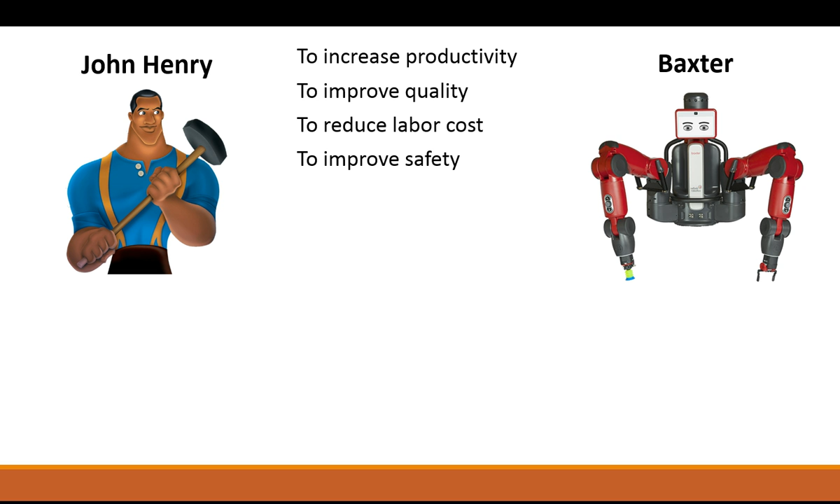It's able to improve safety because actually Baxter can get hurt or get damaged without actually hurting a person. You can put it in more dangerous situations. So you've got some really good arguments for going into a state where you've got more automation.

So on the left, you have John Henry, where it's very labor intensive. And on the right, you've got something called Industry 4.0. Now, what is Industry 4.0? It's the whole idea of going into a more automated, more computer-based industry where you remove a lot of the human factor.

Able to get a much more efficient, much more safe, much more productive manufacturing process, as well as having a lot more transparency, a lot better communication between different entities, and being able to respond better, a lot more flexibility. Now, that sounds like almost a utopia.

You can have a factory without anybody working in it, without any human interaction. You're actually able to produce parts faster without having to worry about vacation time and all sorts of other issues. But really, what's the difference? What's stopping us from doing this tomorrow?

Well, there's a lot of things, a lot of benefits to John Henry. A lot of benefits to actually having people in the marketplace, particularly in an industry. Some of them are so simple that we tend to take for granted.

Number one, John Henry can think. John Henry doesn't need to be programmed. You don't need to put an algorithm in place for John Henry to know what to do first, second, or third. John Henry can solve a problem, and more importantly, John Henry can make judgments.

So when John Henry drops a wrench in the path of a machine, he knows to stop the machine and pick it up. He doesn't have to have that programmed into him. And anybody who's ever worked around machines has seen things like machines crash, slam into something. Maybe it was programmed poorly, maybe something just happened to get in the way, but it couldn't respond to contingencies the same way a person could.

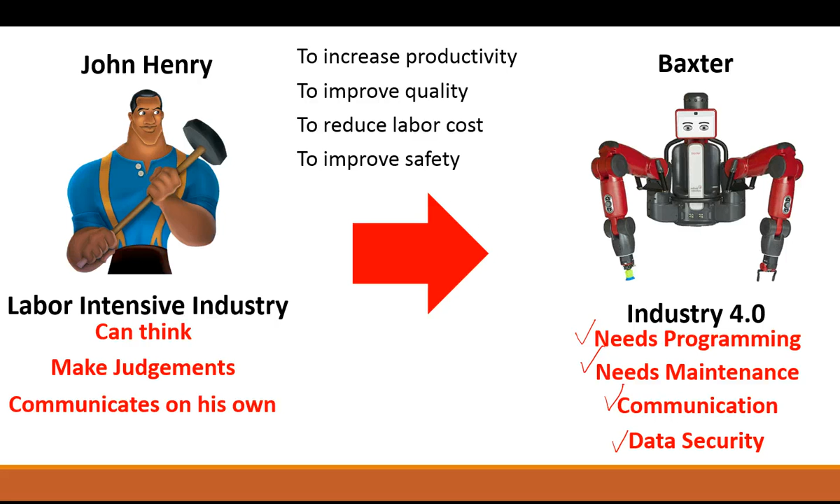With all this, we come to a new issue introduced in this dream of going from a more labor intensive industry to Industry 4.0, computer based automation, lights out operations, and that is known as the skills gap. Now, I'm not going to say the skills gap is purely based on reaching Industry 4.0. There's a lot of reasons and things that go into making it up. But it's definitely part of the issue with why we can't just switch to this tomorrow. There's a lot of different skills required to get us from where we've been in the past to this vision of Industry 4.0.

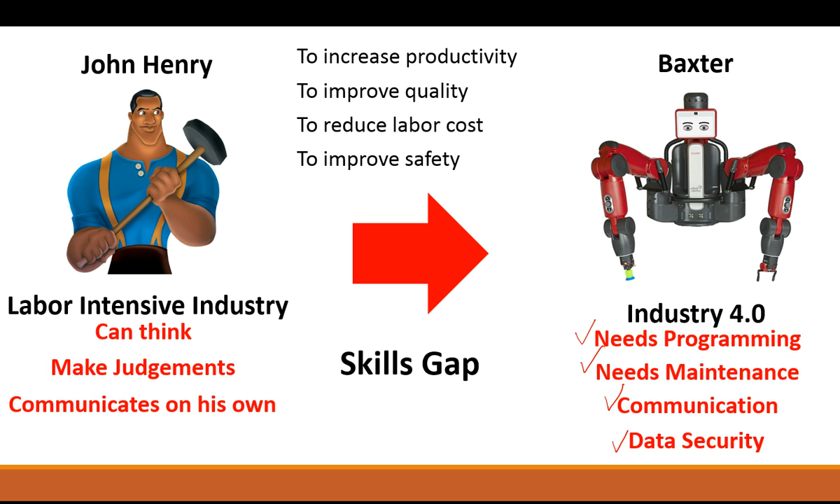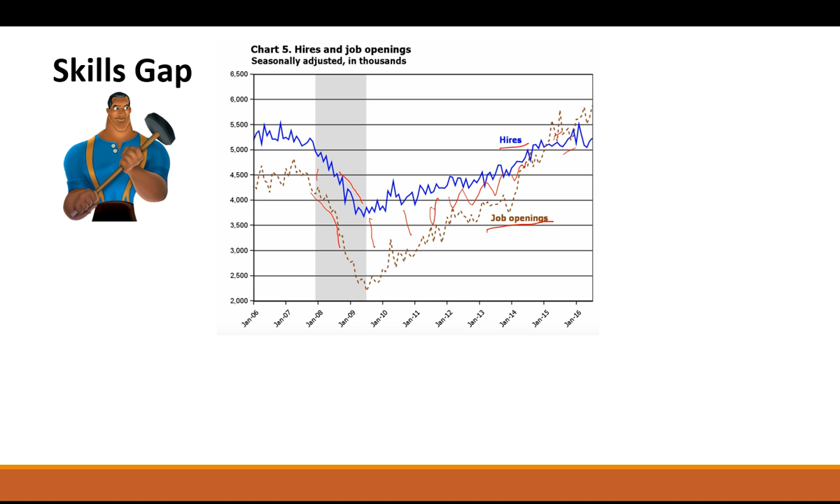Now, how big is this gap? How significant is this problem? We've had 500,000, almost half a million, or more than half a million jobs that went unfilled, simply because the skills weren't there to fill them. So what kind of skills did we have missing?

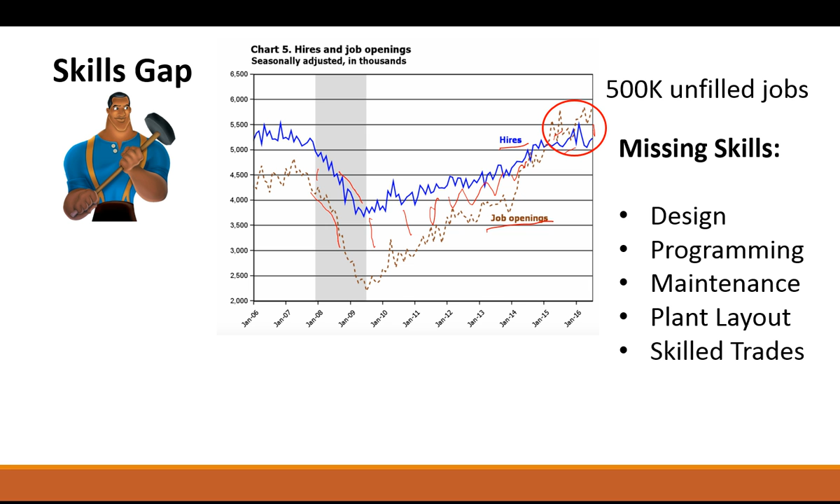A lot of the skills missing were things like people with STEM-based skills. One was design — regular engineering, mechanical engineering, electrical engineering work for design of machines and design of manufacturing processes. Another skill was programming, in various types. Another would be maintenance, understanding plant layout, how a plant needs to be set up so it's most efficient. And then, believe it or not, skilled trades. Even in this age of automation, there will always be a place for people who have a skill in their trade — skilled plumbers, skilled pipe fitters, skilled millwrights, as well as skilled machinists.

Keep in mind that manufacturing, whether we get the perfect Industry 4.0 or not, is always moving towards automation. We're always trying to get the benefits of automation — more efficient, lower labor costs, and definitely a safer environment for people. But in order to get to that, we still need skilled people to implement this whole concept of a more automated, more flexible, more transparent workplace.

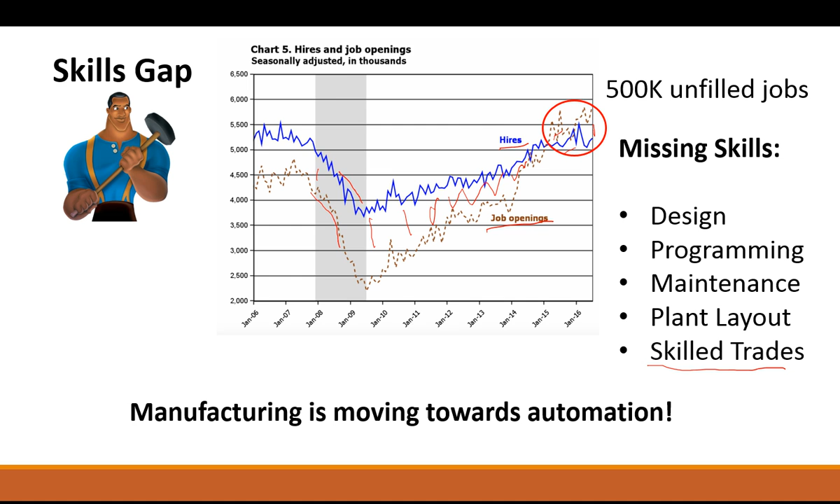So when we look at automation, we could break it up into various levels. Starting at the most local level, the device level. The device level is sensors, actuators, different types of hardware elements that you're going to interface with — the ability to shut and open a door quickly, the ability to shut off and open a valve remotely. Those are all things on the device level, a very localized activity.

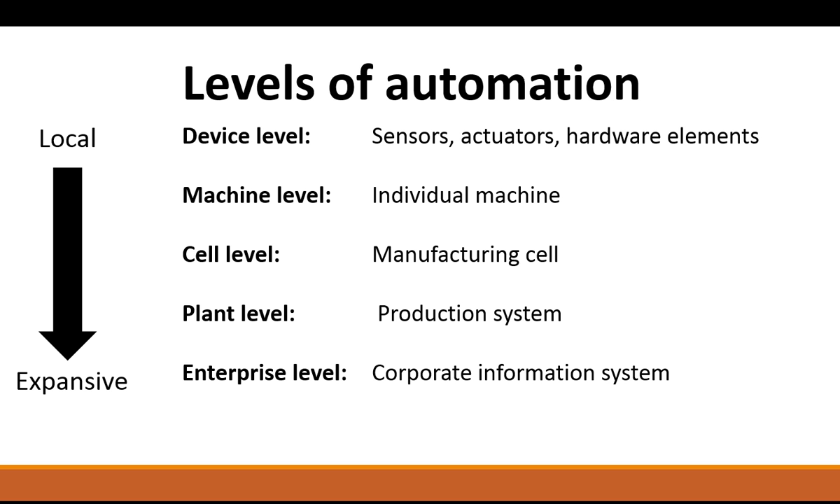As you go down through the list of levels of automation, they go from a very local idea down to a machine, where you're actually automating the machine itself, to automating an entire cell, which is various machines and devices working together, to the plant level where you're looking at different cells interacting together, all the way to the enterprise level — where you have different factories, different plants, different vendors and manufacturers communicating and working together.

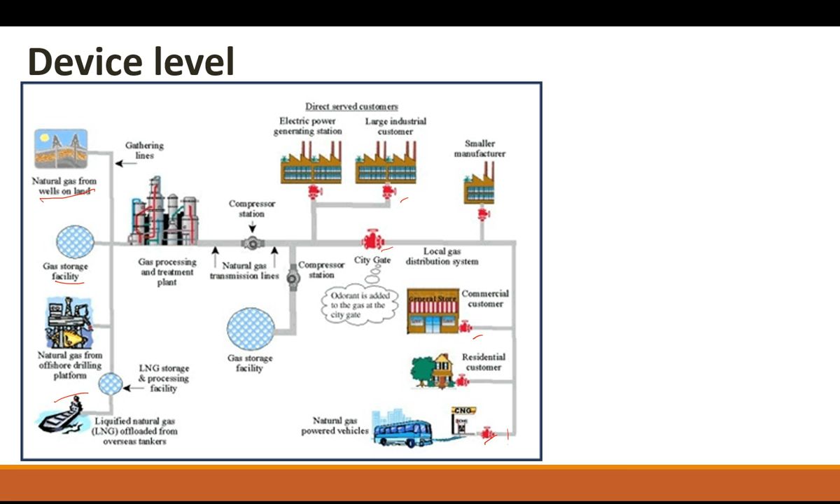Now, this could be natural gas, this could be oil, this could be looking at different things inside of a factory itself. What I want you to focus on are these little red devices here and here, all throughout the drawing, all throughout the schematic. Consider these are what are known as actuator valves.

What are actuator valves? That's the device we're talking about. The actuator valve is simply a big switch that you can turn on using automation, turn on and off to shut a line down. Now, this could be for safety, this could be for lack of payment, there could be any number of reasons that you might want to shut down one valve over another, misdirect or redirect the flow of gas from one place or the other. The way this is done is you have this actuator valve actually being put onto a pipe or within the line, in the system.

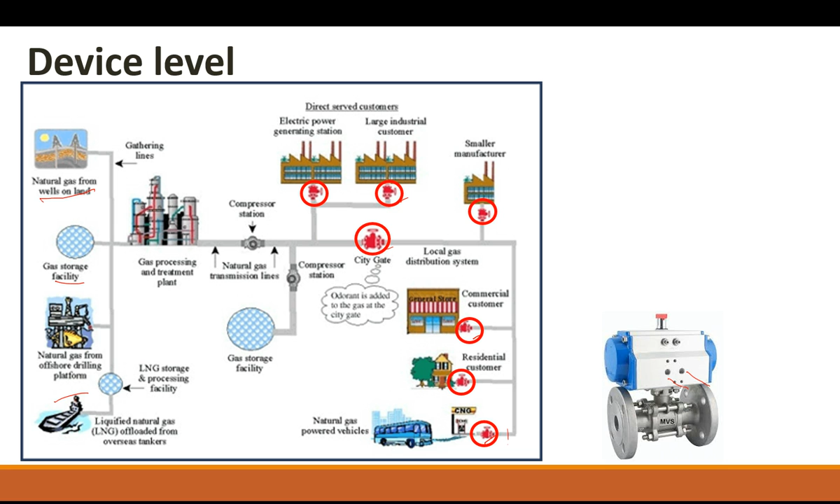And through some sort of control mechanism, the valve is shut on and off. So if there's a safety issue, or some sort of need for an efficient and very quick turn off, you can do this remotely, from some central location where you can shut the valve on and off.

Now, how does this happen? Well, the technical term would be through a PLC. And this is a system that has to actually be programmed, and it's one of the most basic levels of programming and basic levels of automation that you'll see in any type of manufacturing or industrial situation. And that's the device level.

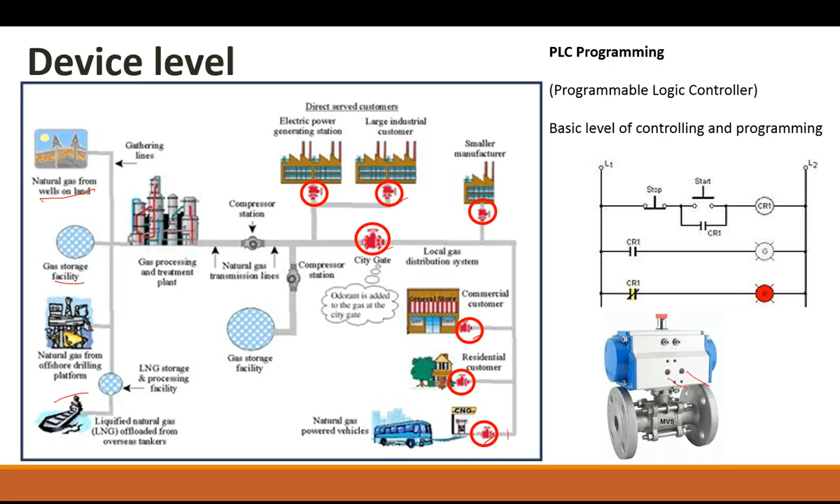So in order to understand PLC, you also have to understand something called ladder logic, which is essentially just a schematic for understanding this sort of control system. If you understand ladder logic, you can later go on and translate that into this type of device level control.

Now, when you consider something like the machine level, it's a little more sophisticated than the device level. To understand the significance of machine level, you can look at any phase of manufacturing, but we're going to look at machining. You have traditionally conventional machines - this is just a conventional lathe, and over here on the left, a conventional knee mill. No computers to help program it, no automation, just a motor that actually turns a spindle that holds the workpiece or holds a tool, and performs metal removal processes inside of the machine itself.

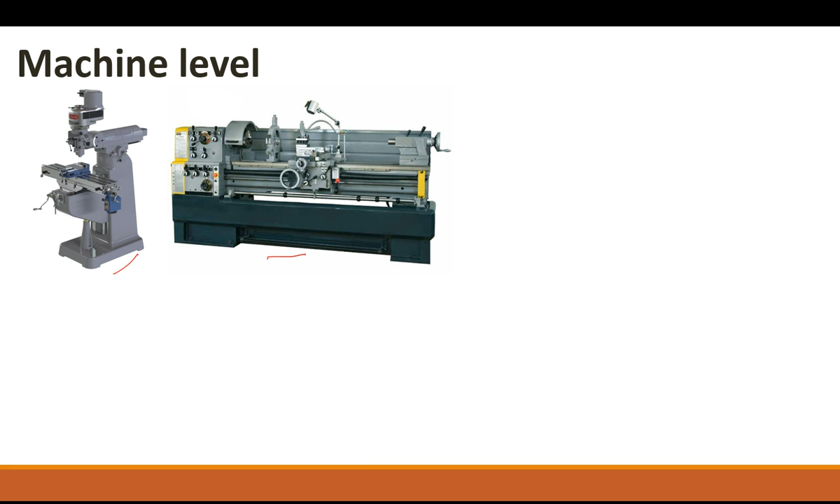This is a very skill-intensive operation that would require you to have either a journeyman or a very well-trained apprentice running this operation. Now, if we were to put some automation into this process, we could end up with something like this, a CNC machine with 5 axes. 5 axes meaning you can get much more sophisticated parts, a lot more sophisticated curves, generating a lot of really unique geometries. You're able to produce the part with a lot more repeatability, a lot more accuracy.

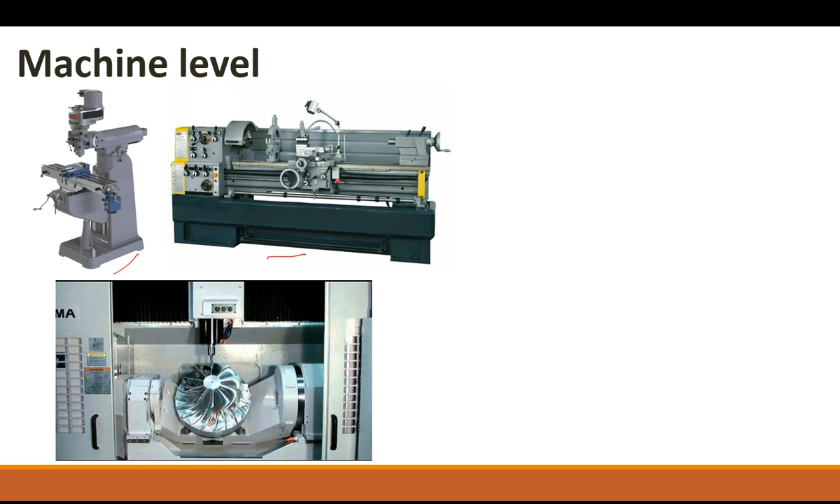Now, how would you do this, or one of the skills that would be required? With conventional machining, you actually need a very well-trained, skilled trade machinist. With CNC machining, what you need is a programmer - a programmer and somebody who has some very basic machining skills, who understands how the machine is supposed to work, but your primary skill set comes in the programming now. So you've moved the skill upstream.

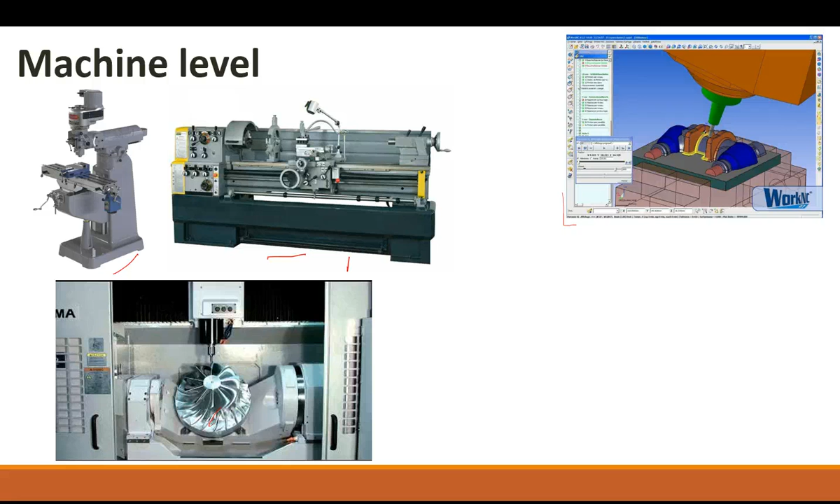And what you see here is just the CAM software, computer automated or computer assisted manufacturing software, where you can actually generate your tool paths and get much more sophisticated cutting paths than you would with a conventional machine. Other programming that could take place is straight G code, G and M code, which is just a different way of typing in the programming that goes into the machine tool. The computer-aided manufacturing can actually generate G and M code.

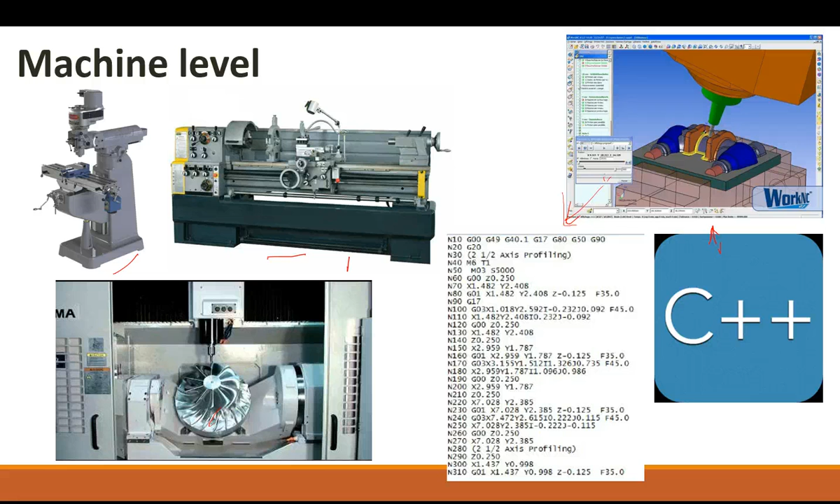And if you really want to go upstream, you could actually program the software that makes this. So that comes in various different methods. In this case, I'm just showing you C++. So this is the machine level, and you can see a little bit more of this in the video coming up.

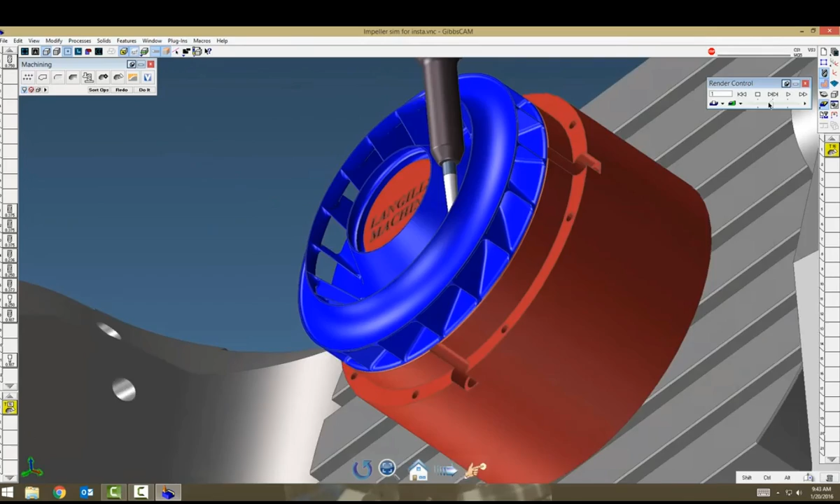So what you have here is the computer-aided design and computer-aided manufacturing portion. This is much more user-friendly than the actual setup of this machine if we were to use conventional milling. So a lot more automated, but you have it all the way down to the type of machine, to the type of cutting tool, as well as how the workpiece is held.

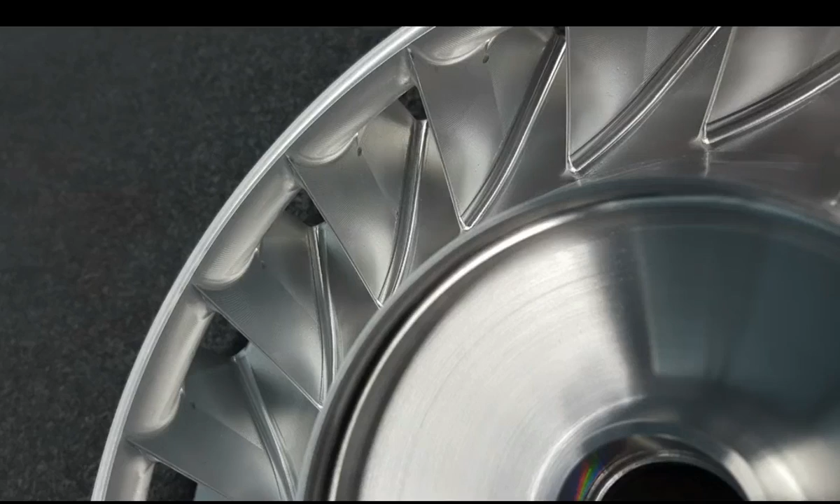Now that program can be sent to the actual CNC machine, and you can see it's very similar layout, very similar tooling, very similar work holding, and it gives the tool or the machine the actual access to all the complicated radiuses and geometries to make this component. This is significantly faster, significantly more efficient than the traditional method of machining. And what you can see is you end up with a very good part, a very well machined part at the end.

After the machine level, if we consider just working on the machine, the next level of automation is the cell level. What is a machining cell? In this case, we're going with the machining theme. A machining cell is various machines and devices working in concert together.

In this example, you've got a robot picking some sort of part running on a conveyor. You've got an input and an output, one typically going in, one going out. You've got a base of parts that the robot works with, doing essentially the same thing a manual operator would do. I've seen this with CNC machines where the robot loads parts into the machine, which starts automatically and shuts its own doors. Once machining is done, the robot takes the part back out, puts it on the conveyor, and it goes to its next operation. That's a complete operation that runs on its own through the cell.

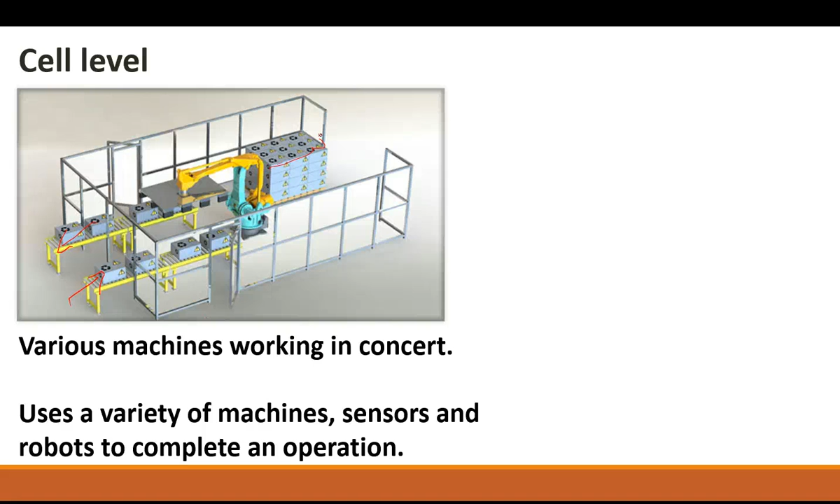It's pretty complicated, with all the different devices we talked about in the past, and probably quite a few more. It's also got a lot of sensors. One issue with automation is that machines can't think or have judgment, so you need different ways to give them that judgment. Here we have Baxter, but we also have proximity switches. Baxter can't really judge good versus poor quality. We could make it detect something, but even then he's dependent on some sort of sensor within himself. You can also use sensors or cameras to make sure the part is actually in place.

These things all have to be programmed, not just individually like at the device or machine level, but now you have to get the machine and all its corresponding peripheral equipment to work with each other in a synchronized way, so you can not only produce a good part but continue producing good parts. If you have a camera or some way to judge whether something has gone wrong in the process, like tooling wearing down or misalignment, you can avoid a crash. I've seen this happen with machining cells where something sat improperly on the conveyor and the robot started stacking parts on top of each other accidentally. You need some way of handling the judgment that a person could do, which an automated cell needs help with.

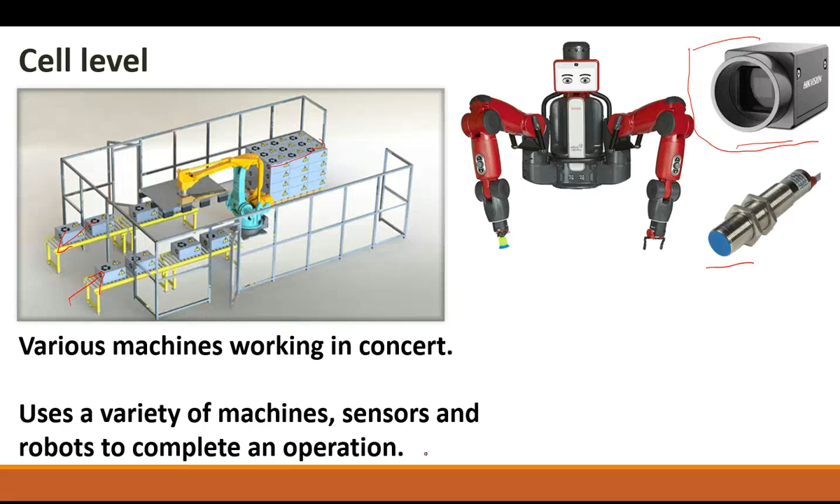That's another level of programming required. In this case, you'd actually need a manufacturing engineer - those skills would be needed. You'd need an electrical engineer or someone who could do PLC programming. The robot may have its own programming system. And there needs to be some way of monitoring the whole system, sending information into and out of the cell so it can be reset up and readjusted for other operations. That's the cell level.

The next level after the cell level is the plant level, and this is where Industry 4.0 really starts to shine. Everything else we've looked at, you've got some variation of today that works pretty successfully. Now we're moving toward getting all these different cells to work with each other - robots working with each other, HMIs (human machine interfaces), getting all the sensors on the same page. This is machine tool monitoring - knowing what the machine is doing and when, and being able to understand this remotely. This is a major part of technology that's been developed over the last 5 to 10 years.

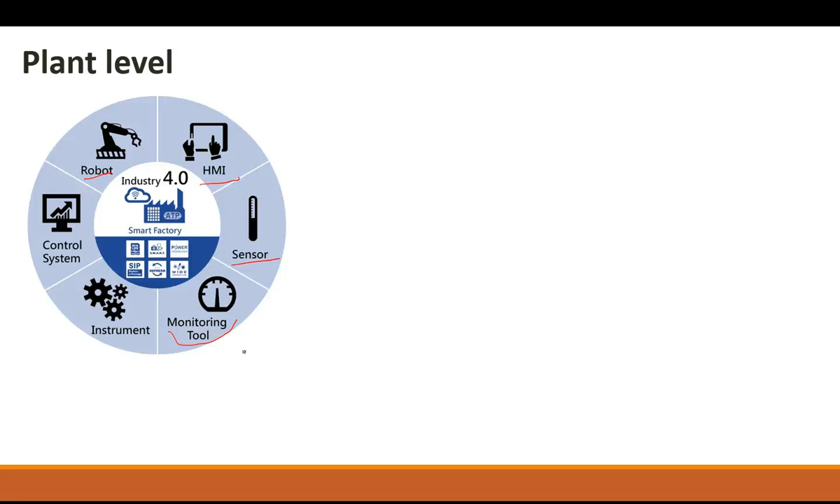I think it's been more like 5 years that we've been seeing more and more machine monitoring technology, different types of apps being able to monitor this on your phone and respond back. These are part of the vision of Industry 4.0. We've got some sort of controlling system, whether it's an app from your phone, different controllers within the plant, or even outside of the plant, where you have multiple cells acting in concert with one another.

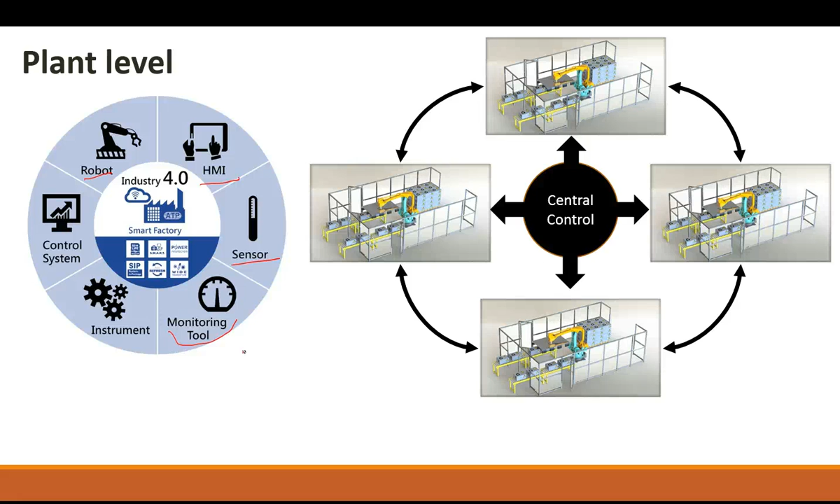So what you get with this Industry 4.0 setup are the benefits: flexibility, something that's very responsive. You can get information from several places and make a judgment on what you need to change in the cell remotely. You've got interoperability. These are the visions of Industry 4.0, to where you can have a lot more automation controlling the entire plant with a lot less human intervention.

And I'm talking downstream. Now, as you can see, when you look at this from an upstream standpoint, this is where all your opportunity lies. This is where all the programming takes place, where all the planning takes place, where all the engineering work takes place in order to achieve this goal. So these are the opportunities that are needing to be implemented.

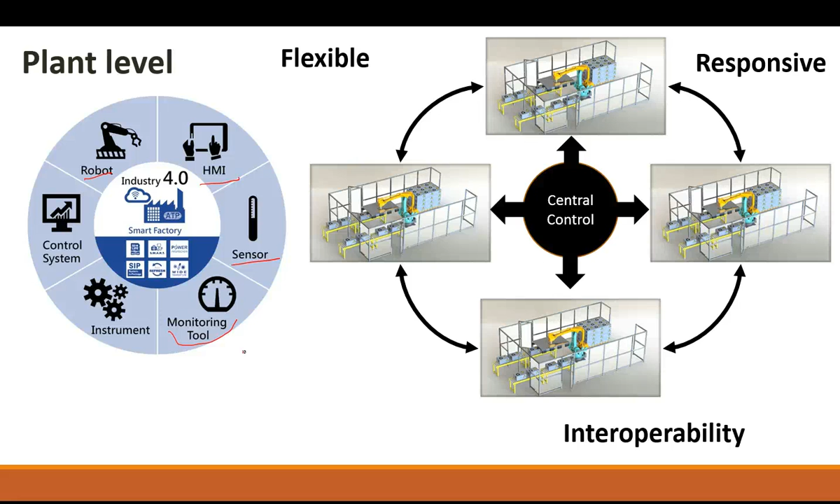And again, this is part and a major part of the skills gap. These are the skills that need to be replaced. So if you were John Henry, this is where you're starting to look at to understand where your new place is in history. We're talking about web-based programming, use of the cloud, and being able to utilize big data.

Then, of course, the last level is the enterprise level. And all this is looking at different entities interacting with each other. This could be different plants, a plant and a supplier, or two different divisions of the same company. So anytime you'd have companies that might have to share communication with each other and knowing where things are in the value stream.

So you're able to address the supply chain. Any type of supply chain issues can start to be addressed. You can adjust to customer demands. So if you have customer entity A and entity B, and entity A needs to buy several more units of whatever entity B is producing, you can actually make some sort of adjustment.

You have a lot more transparency. You're able to say, okay, what is going on between these different companies, depending on how you want your data to be shared. And you can also share things such as best practices. So if you've got two divisions in different parts of the country, or two different companies, the enterprise level of automation allows that information to be shared automatically. You can see how one company or division solved a particular problem, what caused the problem, and how it was diagnosed.

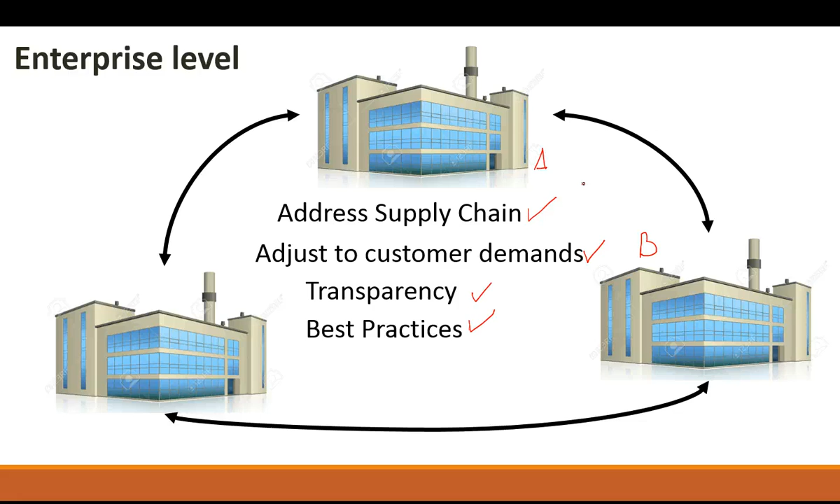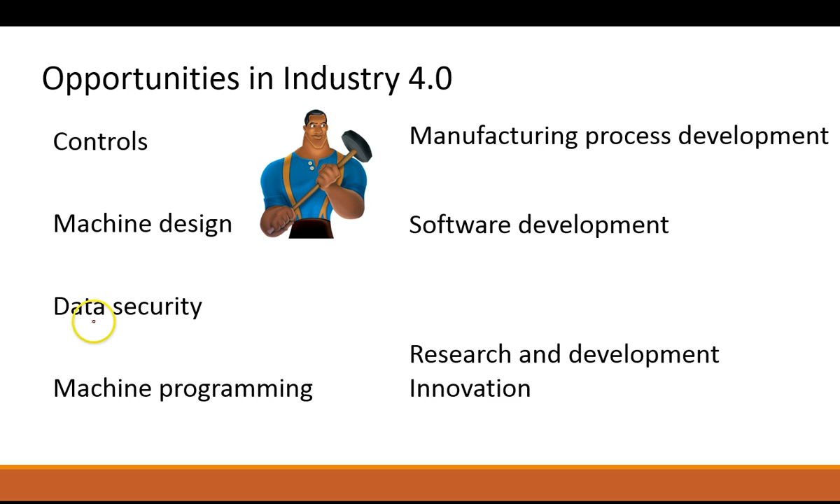And then last but not least, data security. This is going to be one of the bigger issues when it comes to automation, as well as all this transparency. There's certain information that you don't want to share, certain information you do want to share, and being able to secure this, whether it's for competitive advantage, trade secrets, or whatever it is.

So these are the opportunities that exist in Industry 4.0. If you want to go from the traditional type of manufacturing environment - very labor intensive, very manual - and see what you're going to deal with when you move into Industry 4.0, these are the areas where you want to start to look.